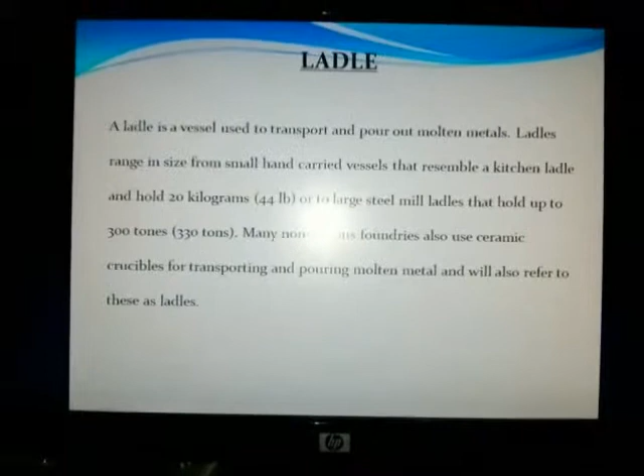As you can see, a ladle is a vessel which is used to transport and pour out molten metals. Ladles are of different types, used in kitchens and for steel making. Our project is for steel plants, where metal is transported in a ladle. A ladle is a cup-like structure by which the molten metal is transported.

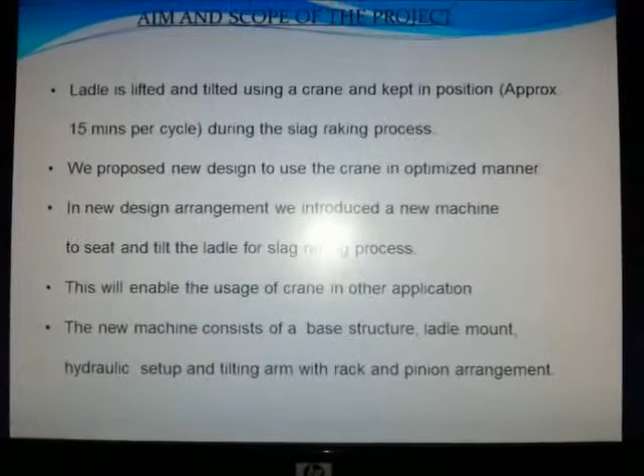Next, let me show you the aim and scope of the project. The ladle is lifted and tilted using a crane and kept in position. The cycle of the old process is 15 minutes, which is the slag raking process. We are introducing a new method by which the crane is used in an optimized manner.

The new design is arranged so that a new machine is designed by which the ladle can be tilted and the slag raking process can be done. This will reduce the usage of cranes. The new machine consists of a base structure, a ladle mount, a hydraulic setup, and a tilting arm with a rack and pinion arrangement.

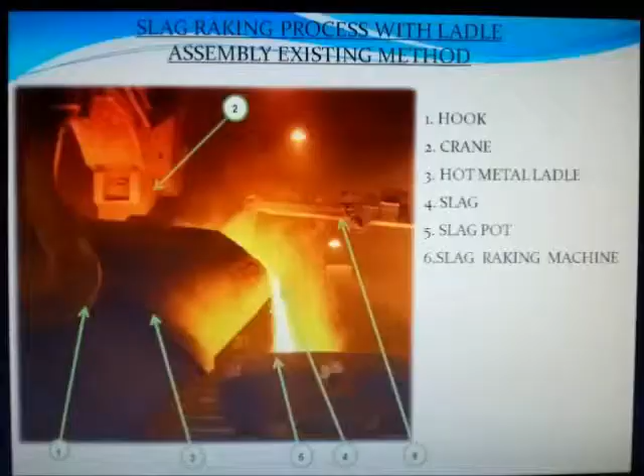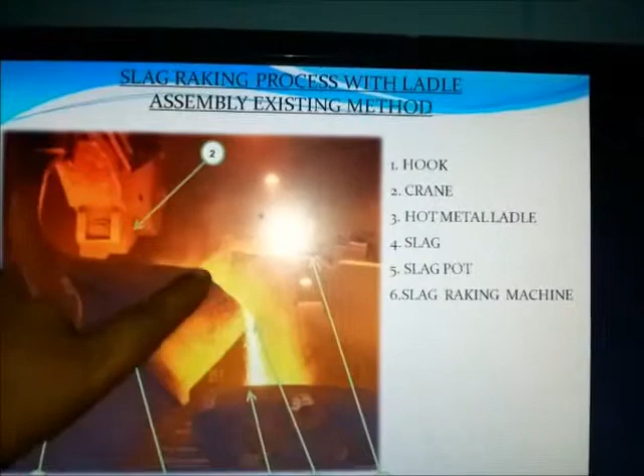This is the old method. This is the ladle, and this is the crane which holds the ladle on both sides. This is the slag raking machine by which the slag is removed. Here is the hook, and you can see one more hook holding it, which makes the ladle tilt. It's almost 9 meters high.

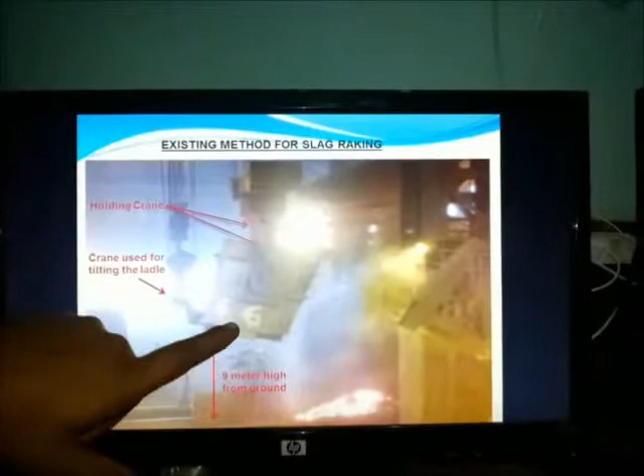In the existing ladle tilting mechanism, the ladle is kept at a height of 9 meters from the ground, and there is a crane used for holding and tilting the ladle. The holding crane holds it on either side of the ladle, and a third crane is used for the tilting purpose.

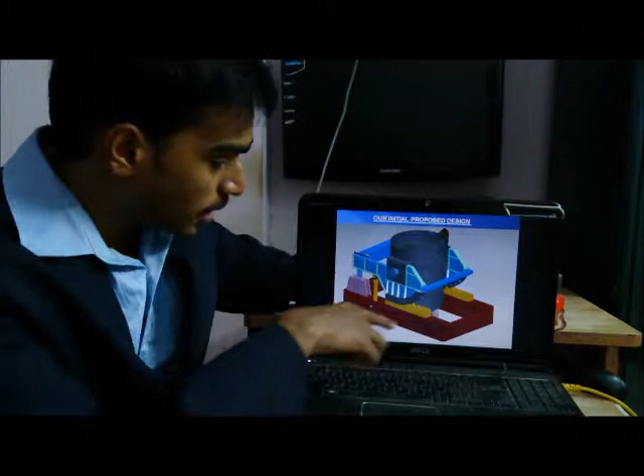Here is our initial proposed design. With this design, we designed a ladle tilting machine in which the ladle will be placed in our ladle mount, and here we gave a counterweight for the ladle for safety purposes. With the help of this hydraulic system, we are going to tilt the ladle to a degree of around 10 to 12 degrees. With the help of the slag raking machine, we will wipe off the slag formed at the top surface.

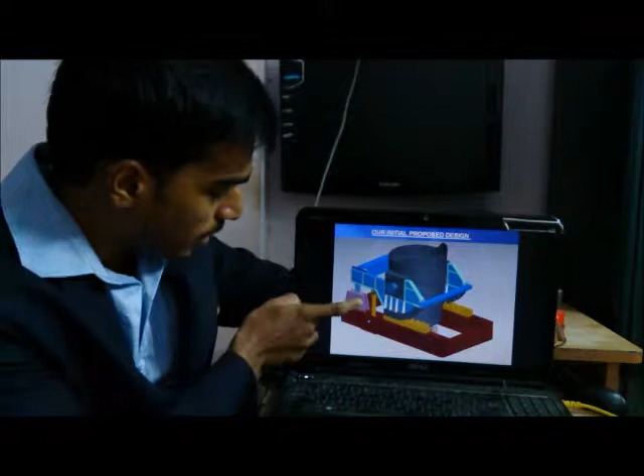But there has been a mistake in this model, that is, we have added a counterweight. Already the weight of the ladle will be around 310 after it's loaded, so we are going to eliminate this counterweight in our next design.

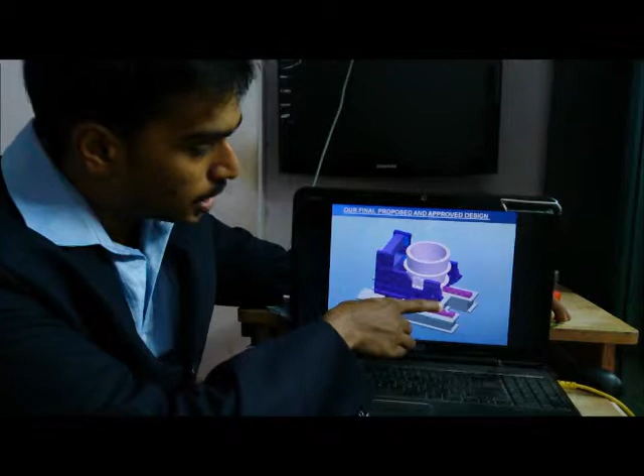This is our final proposed design. Here we eliminated the ladle's counterweight completely, and here we added an extra weight to the ladle mount, which makes the ladle stable. With the help of rack and pinion mechanisms, we ensure safety once more with this ladle tilting. Here the trunnion is held with the ladle mount within the socket mechanism.

So the result: with the help of this ladle tilting mechanism, we are eliminating a crane completely. So the cost, maintenance, and operating cost will be eliminated completely for a single crane. Within the same stipulated time, the ladle's work can be done with a single crane, so the work can be doubled. This is our ladle tilting mechanism.